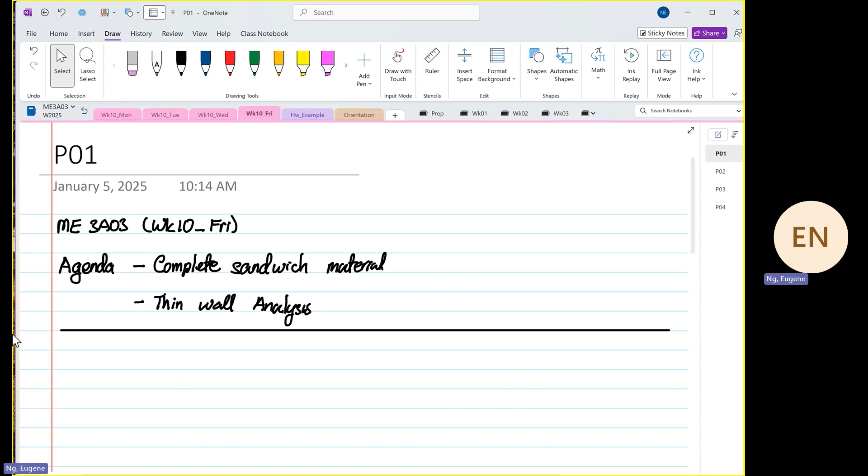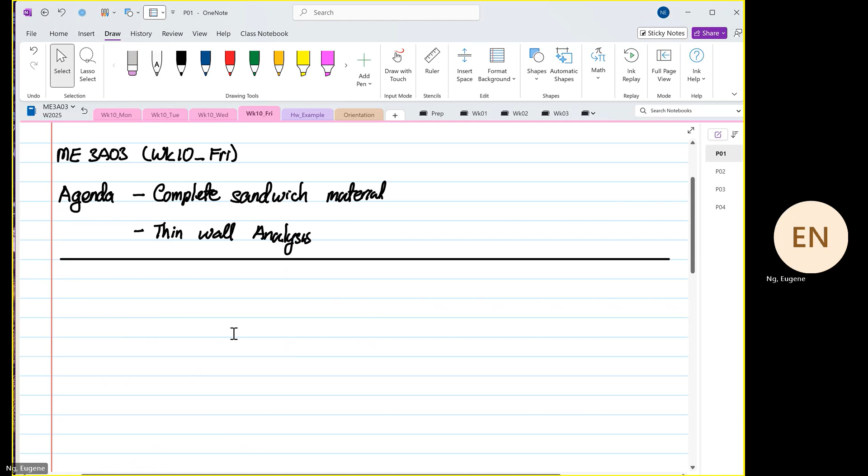I'm going to complete the example on sandwich material. So what we had before, we did this example, and I did it both ways. We found that if we do from QZ, and if we were to base it on steel, we calculated that based on steel... oh, I didn't have my notes here. Did I bring the paper? But anyway, we calculated based on steel is 695.213.

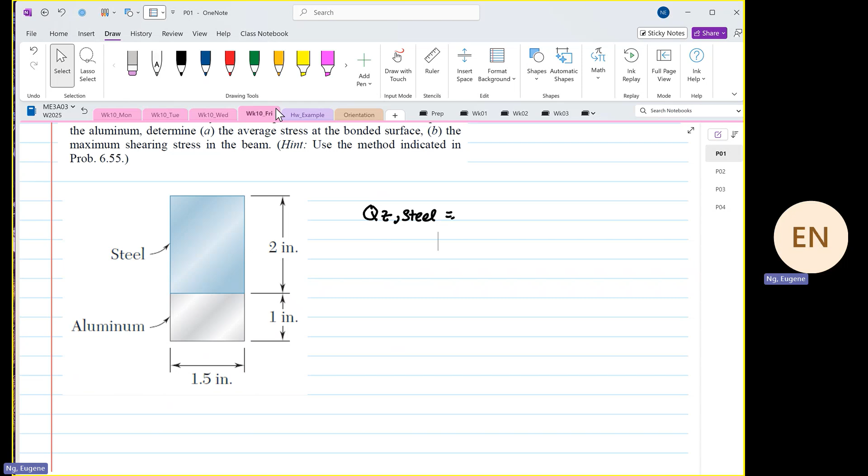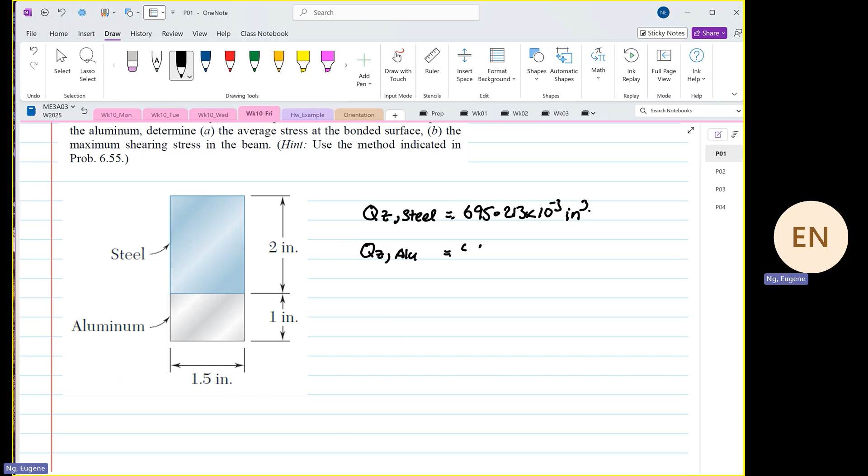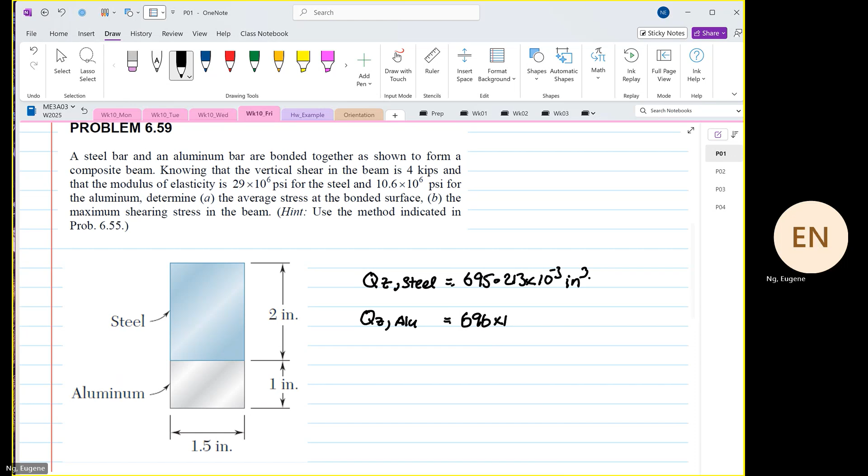That's 695.213 times 10 to the power minus 3 inches cubed. And if we calculate QZ based on aluminum, wait, there's something wrong with my pen now, the number is 696 times 10 to the power minus 3 inches cubed. So the difference by considering the steel or the aluminum, we know that approximately down here—this is our centroid. If we were to calculate for steel, the first moment of area above the centroid has to be positive, below has to be negative.

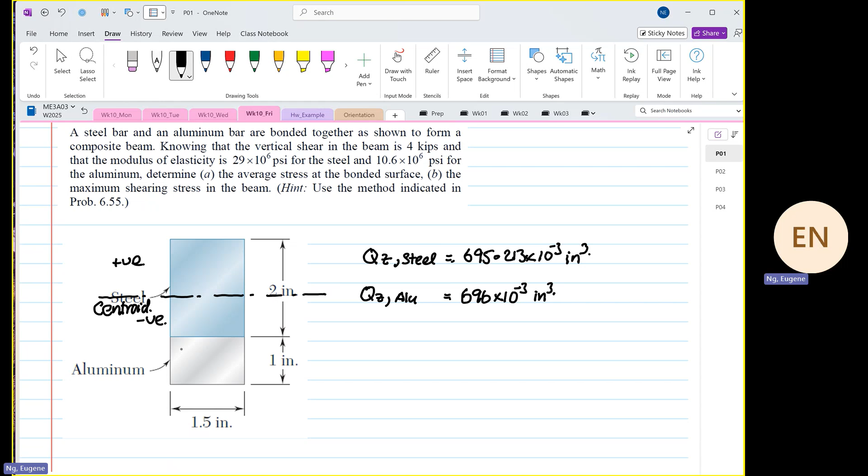If we just consider aluminum, we just take the area down here, no need to bother about positive or negative. Now I'm going to write two formulas for you, based on bending moment. We know that stress X is equal to N Mz over Izz multiplied by Y. That is normal stress, and this normal stress is induced by bending moment. And if we look at shearing stress, we have to be careful.

In terms of shearing stress, shear XY is equal to Vy over Izz. Now, Qz over here will be equal to N omega dy bar divided by thickness, divided by thickness. So the difference is this: when you calculate bending moment, the coefficient N is on the outside, whereas over here, the N belongs to the first moment of area. This is in fact equal to N omega dy bar, and this is also our N omega dy bar.

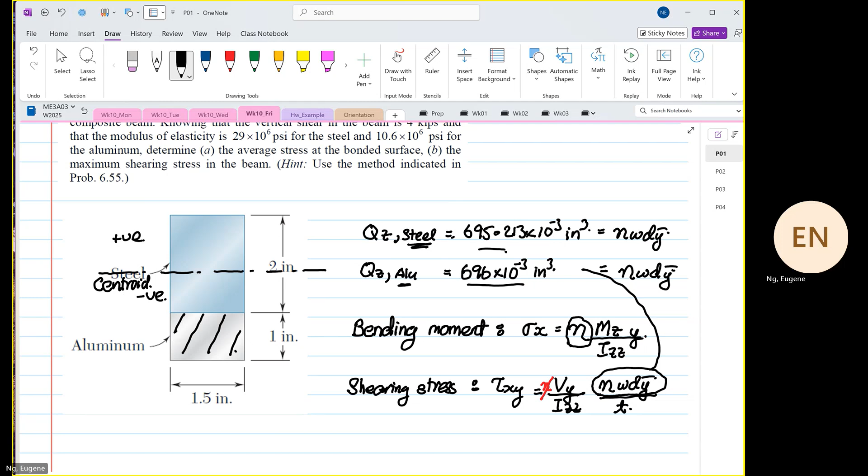So what I'm trying to tell you is this: you don't put another N outside here. Are we clear? You don't put another coefficient outside the value. So we know that if you just consider the steel or aluminum, we realize that the first moment of area is exactly the same. So when that's the case, you calculate the shear stress.

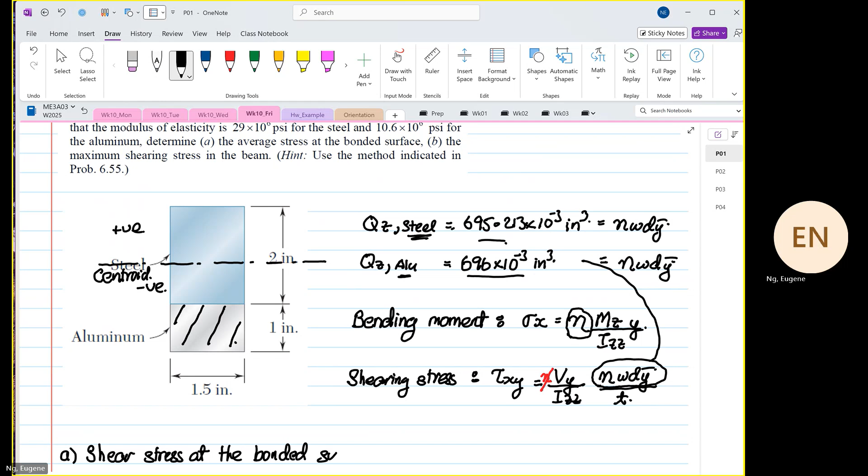So what we are trying to do is we calculate A. We determine the shear stress at the bonded surface. So this will be equal, at the bond, equal to Vy.

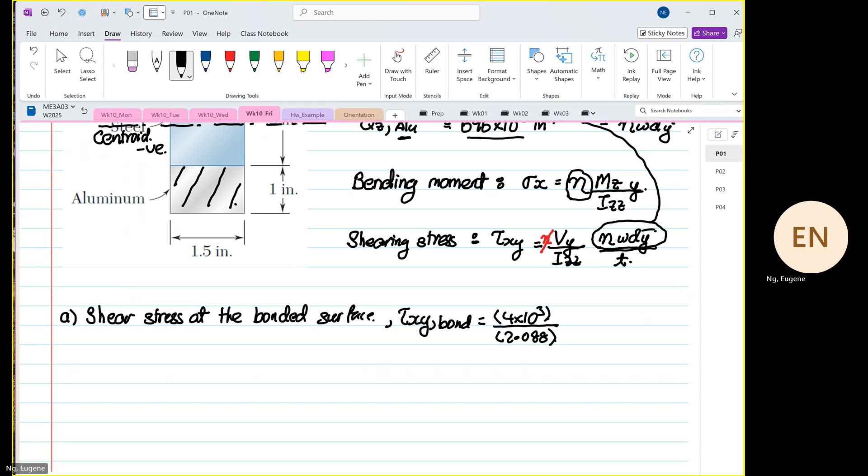We know Vy is equal to 4 times 10 to the power 3, given in the question, over the second moment of area, which we calculate to be 2.088. And then our first moment of area is 696 times 10 to the power minus 3. And then the thickness, you don't change the thickness, is equal to 1.5.

So when that's the case, you have 4 power 3, 696 power minus 3, over 2.088, over 1.5. Let me do it again: 4 times 10 to the power 3 times 696 power minus 3... giving 888.88 psi. So that is one of the values that we have.

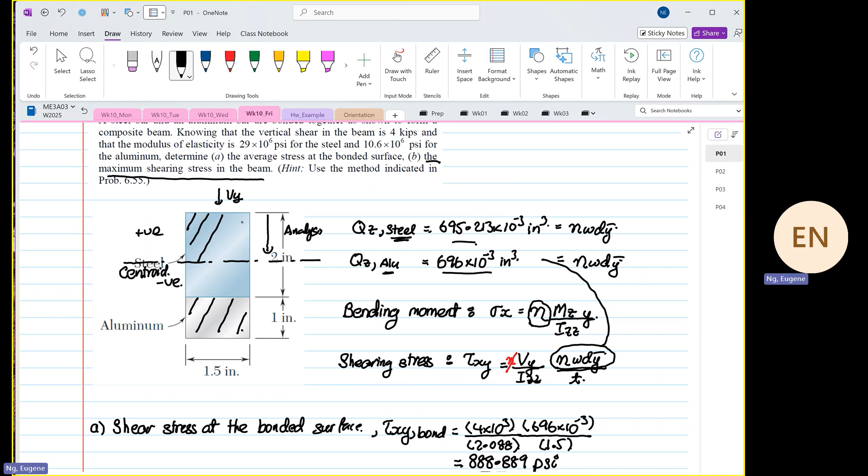So the next thing we're going to do is calculate the maximum shear stress in the beam. We know that this is our Vy, and the analysis starts from the top — this is the analysis direction. So the area we have to consider is this whole area. So we want to find the maximum shearing stress.

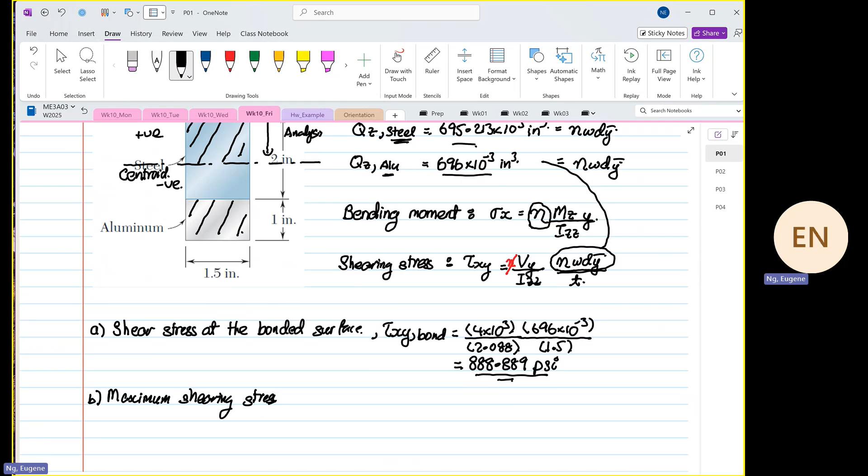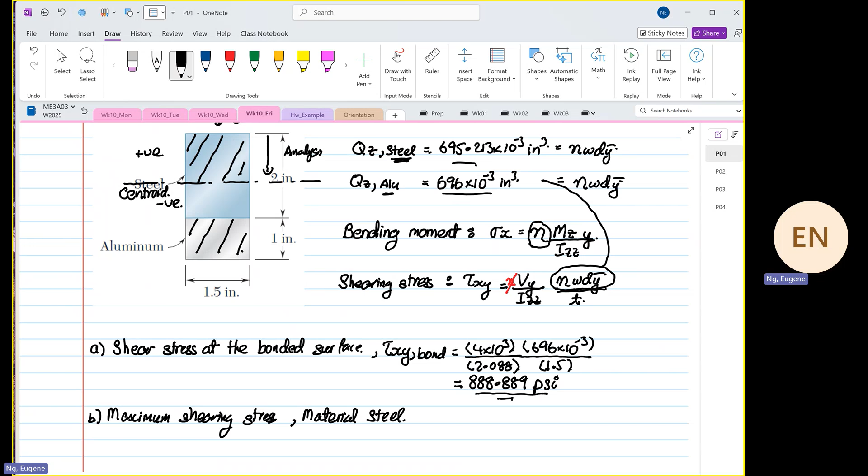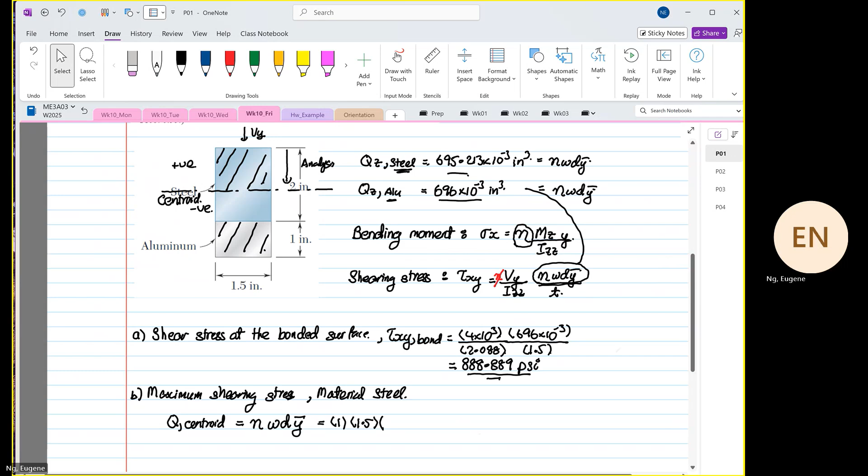If we look at the top, we know the material at the top — we just need to focus on the steel. When we focus on the steel, it's more straightforward, and the reference material we use was steel. So Q at the centroid is equal to N width depth Y bar. N is equal to 1 because our reference material was steel. The width was 1.5, and the distance from the centroid from here to here we found to be 1.232.

This is equal to 1.232. So the depth is 1.232 multiplied by 1.232 divided by 2, which gives 1.138 inches cubed. And then from there on, at the centroid, the width itself is 1.5. So it's equal to 1.453 times 10 to the power 3 psi.

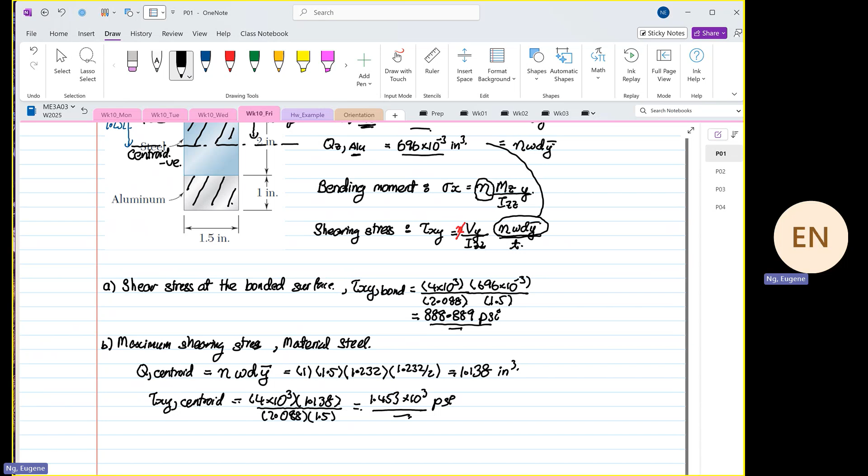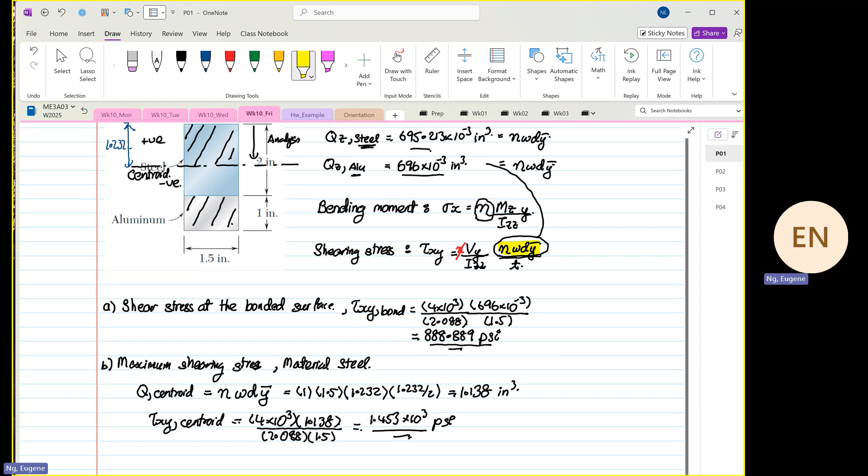So now you will have no problem analyzing composite materials, either in bending due to bending moment or due to shearing force. Are we clear? Bending moment was taught by Dr. Koshi in sandwich material, and this covers the shearing stress. The most important thing is this: the coefficient N is included in the first moment of area and not outside. That's the most important thing.

The next one that we're going to do is one of the most confusing topics in structure analysis, and only mechanical engineers do it. Students in civil engineering don't do this at all. So we are going to deal with thin wall shearing stress analysis.

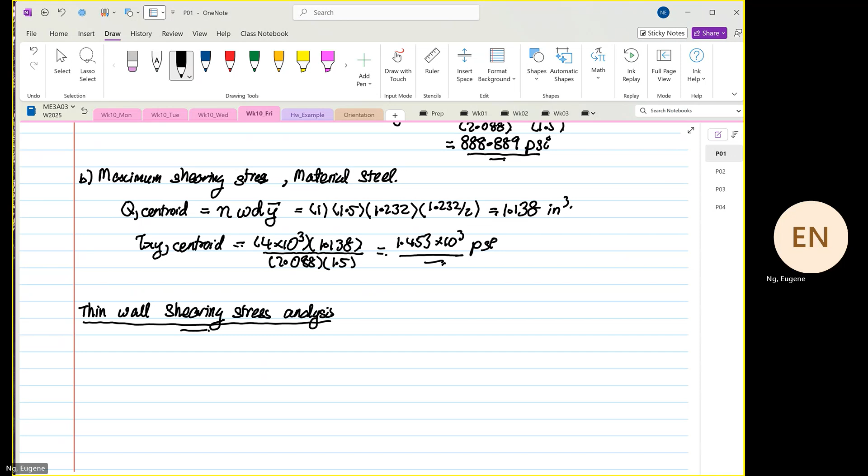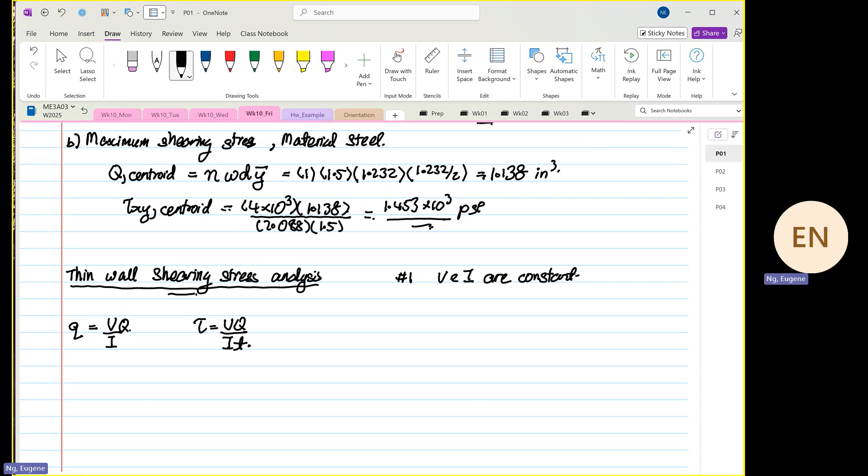The good news is this: we have the formula to use, the shear flow, and the shear stress. The formula is exactly the same, and the rules still work. Rule number 1: V and I are constant — still the same rule. The second rule is the datum is at the geometric centroid — still the same.

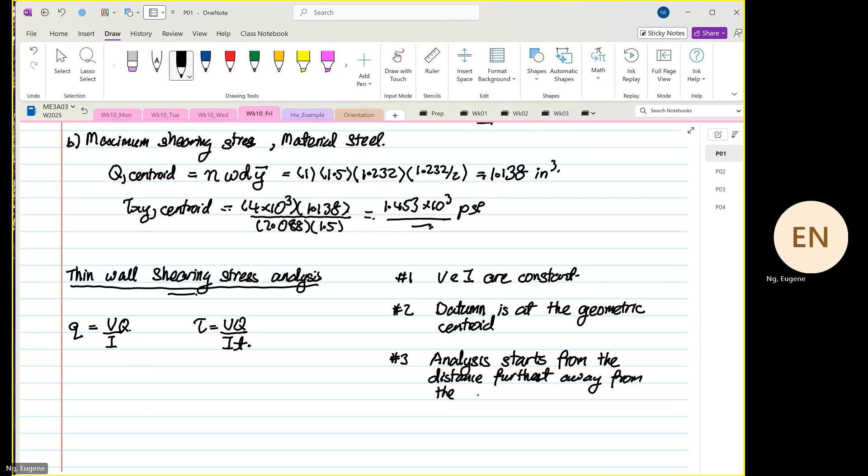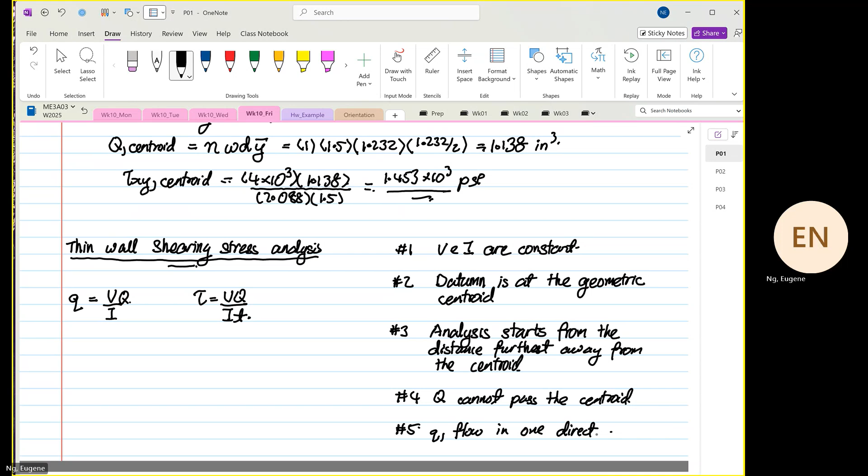The third rule is the analysis starts from the distance furthest away from the centroid. The fourth rule, still the same: the first moment of area cannot pass the centroid. If you want it to cross, I showed you before, you need to do the plus and minus. Rule number 5 is the q flow in one direction only. So these rules still apply, and we have...